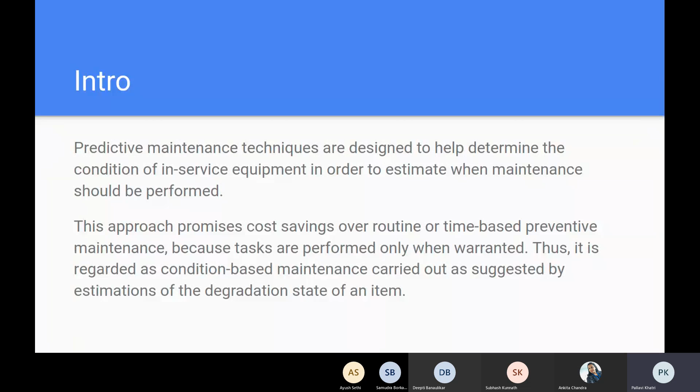So how does predictive maintenance basically work? I was talking about how predictive maintenance needs the complete involvement of a data scientist as well as a domain expert. The domain expert has to tell the data scientist to extract these features, and these can be converted to these outputs. So how does it work? Predictive maintenance uses condition monitoring equipment to evaluate an asset's performance in real time. Now the key element in this process is the IoT device, which allows different assets and systems to connect, work together, and share and analyze data.

Now what happens is IoT relies on predictive maintenance sensors to capture information, make sense of it and identify any areas that need attention. Some examples of predictive maintenance sensors include vibration analysis, oil analysis, thermal imaging and equipment observation.

So to check the vibration, for example, on a motor itself there are some flat points and a meter will be there, and a person has to go in person to check if the vibration is beyond some point. So all these equipments can be fitted over a machine and taken as a regular input instead of taking input weekly or monthly.

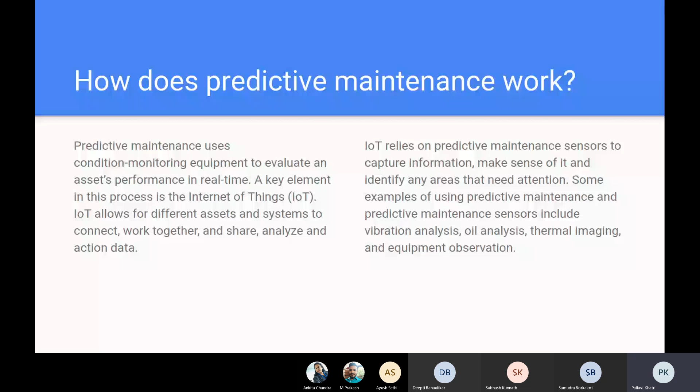Now, what's the goal of condition-based maintenance? The goal of condition-based maintenance is to monitor and spot upcoming equipment failures, so maintenance can be proactively scheduled when it is needed. Maintenance is done only when it is required, not before and not after it has completely collapsed. So asset condition needs to trigger maintenance within a long enough time period before the failure.

Now, as it is not preventive but predictive maintenance, my system will predict that your machine has a useful life of, let's say, 3 weeks, and you need to go and do the maintenance now itself to avoid any failure after 3 weeks. So work can be finished before the asset's performance falls below the optimum.

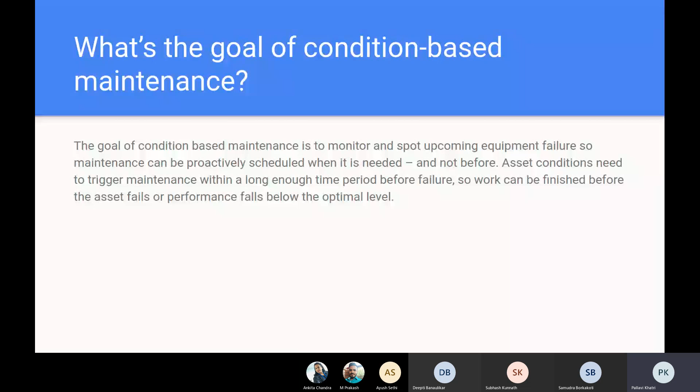So it's a red flag given to the maintenance guys that only for this much time your equipment will work fine, but after this point it will collapse. So the maintenance person can go and check it, replace it before it collapses, and they're saving the cost as well. So there are some advantages as well as disadvantages for condition-based monitoring.

The advantages are: CBM, condition-based monitoring, is performed while the asset is working, which lessens the chance of disruption of the normal operation. As I said, no need to stop the machine. These sensors are fit over the machine itself and take the observations in real time, so we need not shut down the machine and no outages are required.

It reduces the cost of asset failure. It's always better to fix a machine rather than replace it completely. Household equipments are not that costly, but industrial equipments are very costly, and replacing them takes money and time. If I order some equipment now, it might take some months to come, and till then my customers will be on hold.

Industries have their backup machines, but what if the backup machines also fail? Then it will take money and time. So it minimizes the time spent on maintenance. If I'm doing regular maintenance, let's say weekly, monthly, quarterly, half yearly, even when maintenance is not required, it's a wastage of time and money.

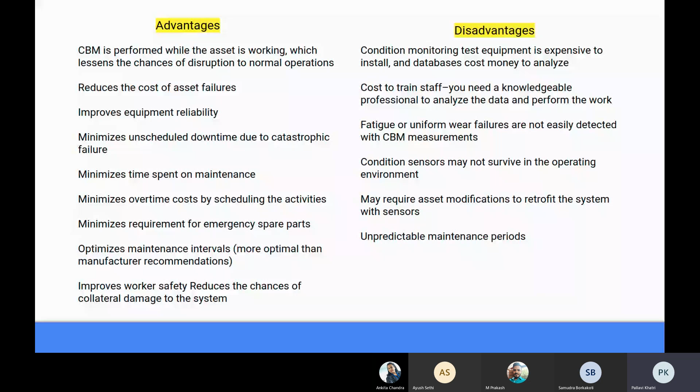So, example of condition-based maintenance. Motor vehicles come with a manufacturer recommended interval for oil replacement. These intervals are based on manufacturer's analysis, years of performance data, and experience. However, this interval is based on an average best guess rather than the actual condition of the oil in any specific vehicle. Now, the idea behind condition-based maintenance is to replace the oil only when the replacement is needed and not at a predetermined schedule.

Now, in the example of industrial equipment, oil analysis can perform an additional function too. So, by looking at the type, size, and shape of the metal particulates that are suspended in the oil, the health of the equipment it is lubricating can be determined. So, let's say my copper wires or something are facing some corrosion. So there will be some lubricants there.

I can test that oil, and based on the content or the materials that are infused in that oil, the health of my machine can be identified. So this is purely based on domain knowledge, in the sense that if I'm talking about an induction motor, an expert for the induction motor is required. If I'm talking about railway tracks, an expert for those tracks has to be involved and give me proper data points that have to be collected from the equipment.

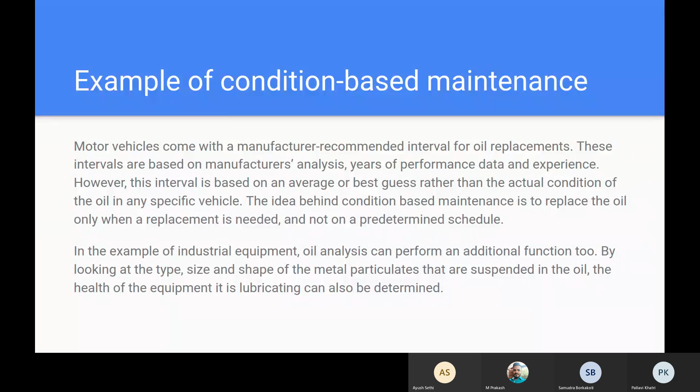Then, types of condition-based maintenance. So these are a few types. There can be more based on the domain. So there will be oil analysis and infrared. Infrared is like thermal or IR imaging. Then there will be some electrical parameters.

So an ammeter is an instrument to check the current in the machine. A voltmeter for the voltages in the machine. So there will be some electrical parameters like current, power input, and mechanical output. Like that, some parameters will be there. Those can be done. Then operational performance: how my machine is performing. So there will be some set of parameters for that.

Then ultrasonic. Ultrasonic will be useful in, let's say, a boat. And then acoustic. So things like a machine being loose or some leakage can only be found out that way. Those come under acoustic maintenance.

And vibration analysis. In vibration analysis, I take the example of a motor itself. A motor has a rotor element and there is some air gap. So if there is an imbalance between the rotor and the stator, the rotating part and the static part, some misalignment, the machine will tend to produce more vibrations. So more vibration might be a sign of machine performance going down or misalignment of the rotor element.

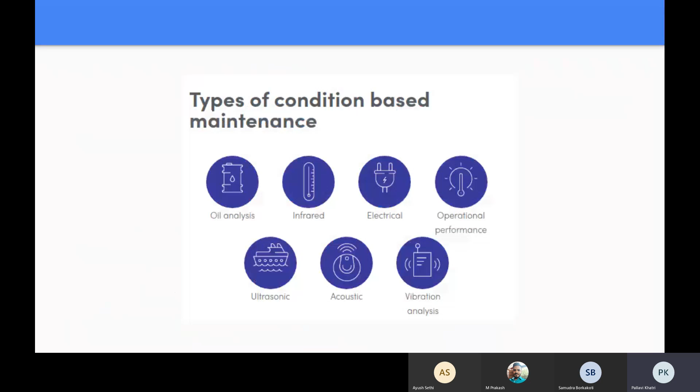So these are some examples of the maintenance points we can take into consideration. There can be more, purely based on the domain. These are a few common examples which are used. The same as in the previous slides, there is some text in front of each. Vibration analysis: rotating elements like a compressor, pump, or motor have a certain degree of vibration. As they degrade or fall out of alignment, the amount of vibration increases, and vibration sensors can be used to detect when this becomes excessive.

Then infrared: IR cameras can be used to detect high temperature conditions in energized equipment. Ultrasonic: detection of deep subsurface defects such as boat hull corrosion. So defects in deep surfaces can be detected using ultrasonic methods. Then acoustic, used to detect gas, liquid, and vacuum leaks. Then oil analysis measures the number and size of particles in a sample to determine asset wear.

So in oil analysis we have a sample of oil. I check all the components which are infused inside it. Then electrical, like motor current readings using clamp-on ammeters. Then operational performance: sensors throughout the system measure pressure, temperature, flow, etc.

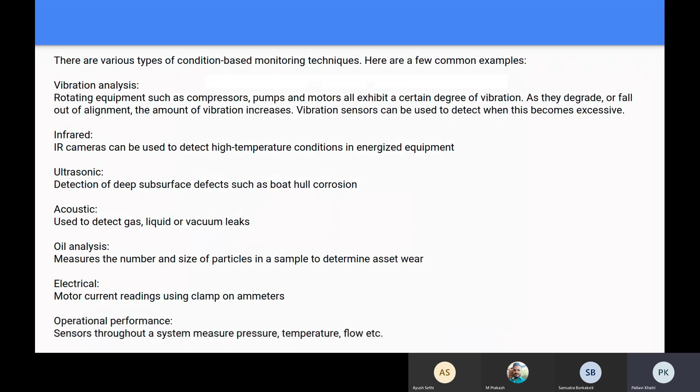So, challenges of condition-based maintenance. It requires an investment in measuring equipment, and the staff has to be upskilled. So the initial cost of implementation is very high. Condition-based monitoring introduces new maintenance techniques which can be difficult to implement due to resistance within the organization.

In factories or industries, people are used to the old method of doing things. So there will be some resistance from them as well: why should we adopt this, when we have to pay such a high cost to install this kind of equipment, and you need to upskill all your labor as well. So some resistance will come within the organization.

Old equipment can be difficult. Nowadays, modern equipment is manufactured keeping in view that monitoring equipment and sensors will be fitted on it. But with older generation equipment, it is difficult to fit all these sensors and monitoring equipment on the spot to measure during production.

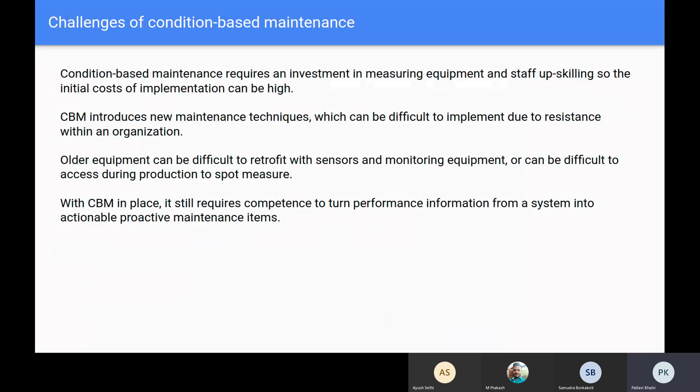Then, in the end, it has cost savings plus higher system reliability. So condition based maintenance allows preventive and corrective actions to be scheduled at the optimal time, thus reducing total cost of ownership. Today, improvements in technology are making it easier to gather, store, and analyze data for condition based monitoring. In particular, condition based monitoring is highly effective where safety and reliability is the paramount concern, such as the aircraft industry,

semiconductor. So, as I said, it should be applied only to the mission critical instruments inside the complete plant, because as installation is expensive, I cannot put sensors on each and every element of the plant. I will have to pick out some critical devices and only put it there. Only then will it be cost effective. If I'm putting it anywhere, it will never be cost effective. It will just be expensive.

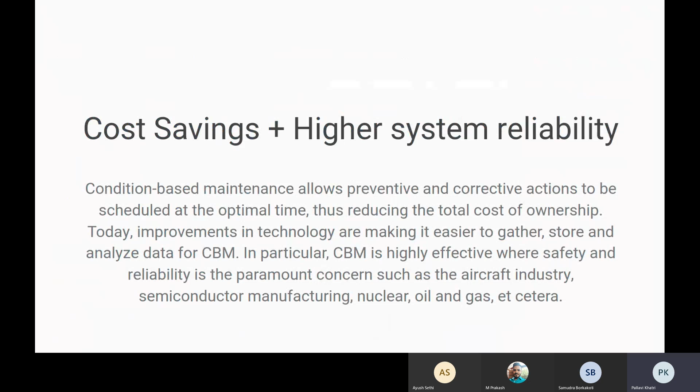So there are some industries where safety and reliability is a paramount concern, such as the aircraft industry, semiconductor manufacturing, nuclear, oil, gas, etc. So what is predictive maintenance suitable for? There are some suitable applications. As I said, it is not like I'll put it anywhere and it will work out in a cost effective manner.

Applications that are suitable for predictive maintenance include those that have a critical operational function, and second, they have some failure modes that can be cost effectively predicted with regular monitoring. So there should be some features or dependent parameters which can be cost effectively detected. For example, some parameters I can just go in person and see. So implementing an object detection camera or any expensive sensors there won't make any sense. So machines which have failure modes that can be cost effectively predicted with regular monitoring are a suitable application.

Now, what is an unsuitable application? Unsuitable applications for predictive maintenance include those that do not serve a critical function, or that do not have a failure mode that can be cost effectively predicted. So these are two critical points. If I go ahead and check all the equipment in the plant to decide what I need to consider for predictive maintenance, I need to check whether it is mission critical equipment, and second, whether there is some failure mode that can be cost effectively predicted. These are the 2 points that have to be considered.

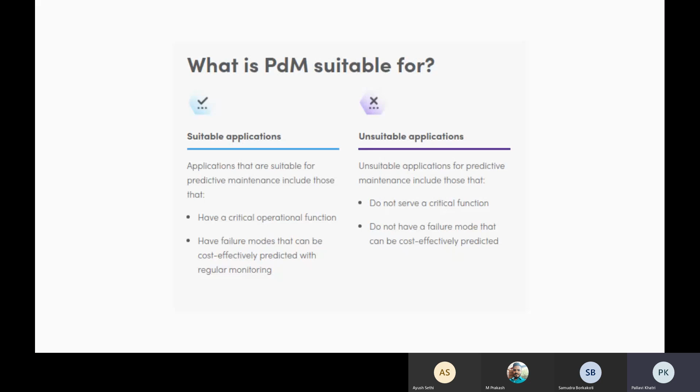Now, what is the impact of predictive maintenance? Predictive maintenance seeks to define the best time to work on an asset, so maintenance frequency is as low as possible and reliability is as high as possible without unnecessary cost. Utilizing the Internet of Things is key to implementing a successful predictive maintenance program, as is the use of predictive maintenance sensors and techniques such as vibration analysis, oil analysis, thermal imaging, and equipment observations.

Although there are some disadvantages to predictive maintenance, like high startup cost, the need for specialized skills, and limitations of some equipment, like old generation equipment that cannot be used, it allows maintenance to be performed only when required, helping facilities cut costs, save time, and maximize resources. Consultation with the equipment manufacturer and a condition monitoring expert should be undertaken before deciding if predictive maintenance is best for the particular asset. So domain expertise is always required in such cases.

We need to talk to the manufacturers and experts. We need to consult them and check whether the equipment we are trying to use for this predictive maintenance is suitable for the job or not. So this is the impact of predictive maintenance.

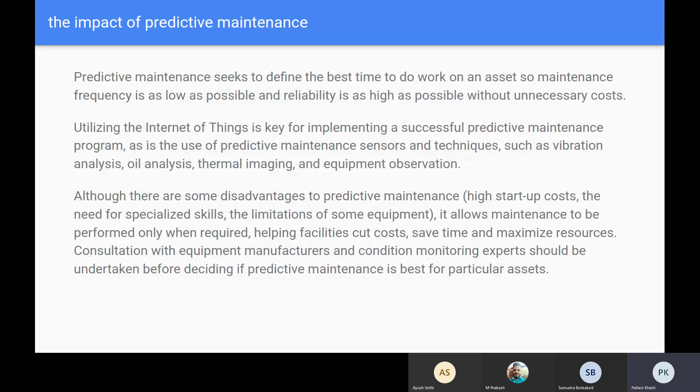Now there are some applications by industry, for example, railway, manufacturing, oil and gas. Railway detects problems before they cause downtime for linear, fixed and mobile assets, improving safety and track void detection through new vehicle cab-based monitoring. So these are some applications by industry: railway, manufacturing, and oil and gas.

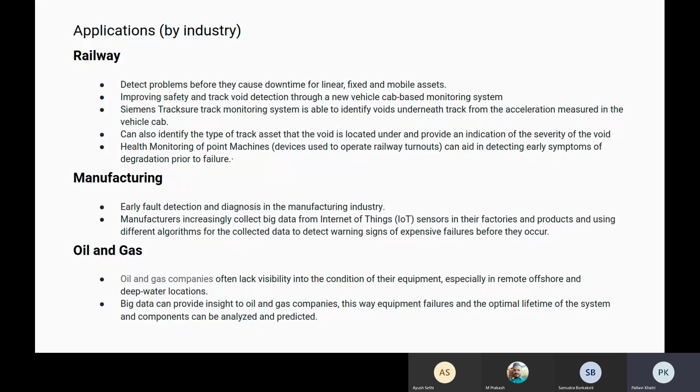Yeah, like, would you say that the aquarium, the aquarium that's there in the office, does it also have some predictive maintenance thing? We are predicting when the conditions are not right. Yeah, it is a kind of predictive maintenance, but not in an industrial application.

Okay. Like what is used in that aquarium? So there are some IoT devices fitted there. IoT devices are basically devices which communicate with one another and make a complete system work.